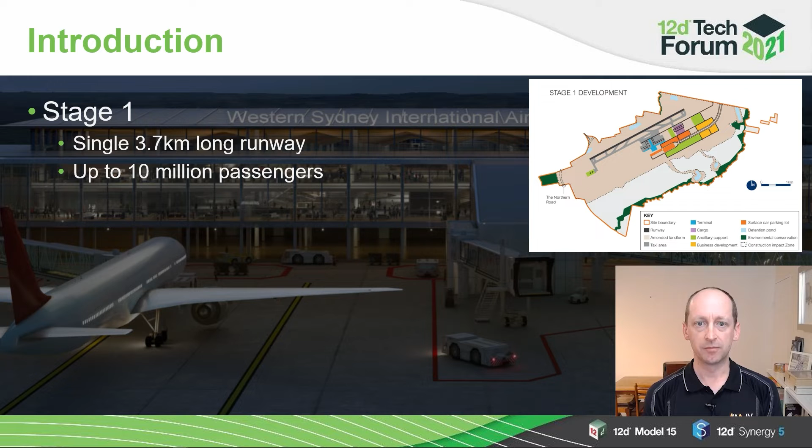When the airport opens in the mid-2020s, it will have a single 3.7 kilometre long runway and associated taxiways, aprons and aviation facilities. This will cater for about 5 million annual passengers, which is expected to grow to 10 million after about 5 years. The airport has been designed to be developed to meet demand. Additional taxiways can be added to increase capacity to about 37 million annual passengers. A second runway will further increase capacity to about 82 million annual passengers around 2063. This is about double the number of passengers through Sydney Kingsford Smith, pre-COVID obviously.

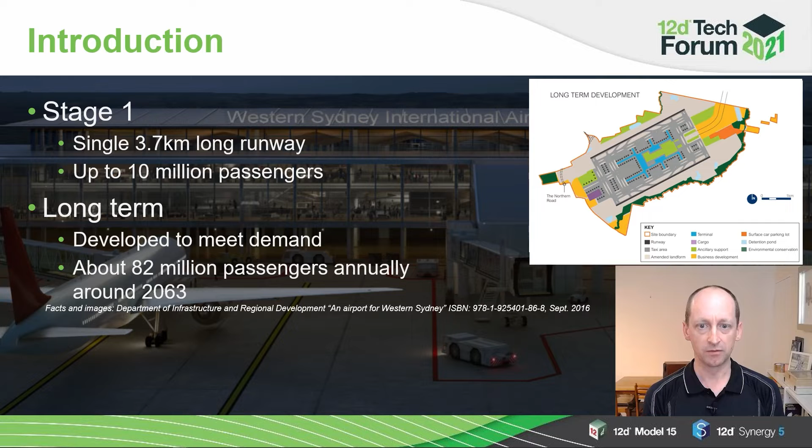It's hard to convey how vast this project is, but two key figures will help. 48 kilometres of stormwater pipe will be constructed, and 25 million cubic metres of earth will be moved, which Pat will talk about next.

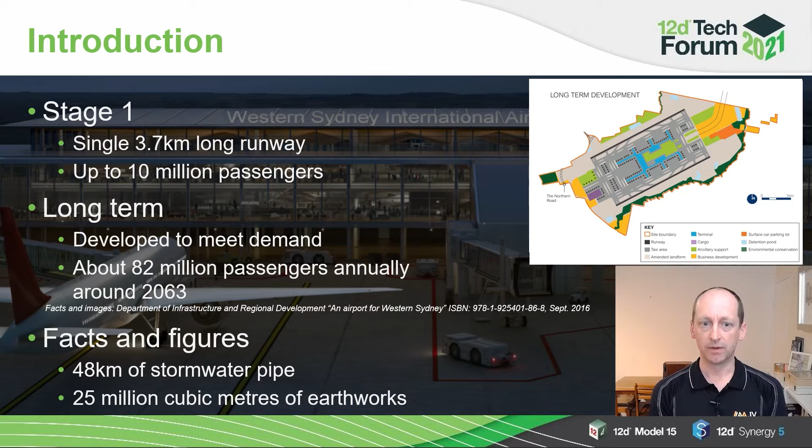12D Synergy was used to manage 12D model data. This gave great vision of data history and seamless data sharing with users around the globe. AAJV 12D model customization enabled consistency of data creation between JV partners and project-specific data sharing. The AAJV 12D model manual helped with the implementation and management of data creation standardization, including information concerning stage, zone, surface naming conventions for projects, models, TINs, and strings.

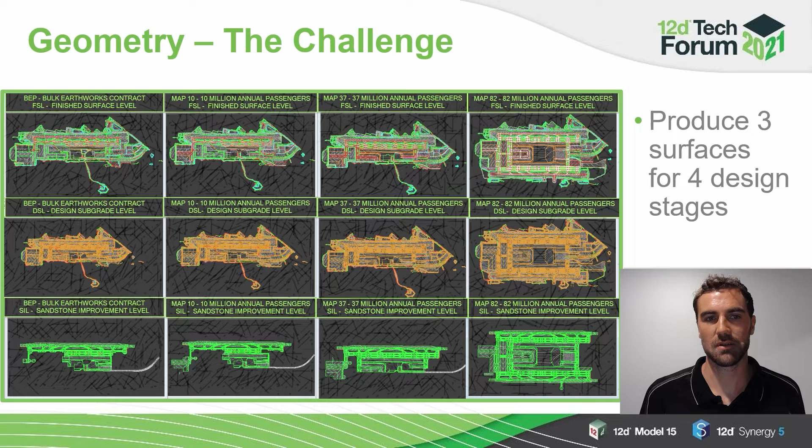The major challenge from a geometry perspective was the scale of the deliverable at hand: to produce 3 surfaces (finished surface level, design subgrade level, sandstone improvement level) for 4 design stages (bulk earthworks contract, 10, 37 and 82 million annual passengers). A total of over 50,000 strings, 2,000 super alignments and 380,000 points.

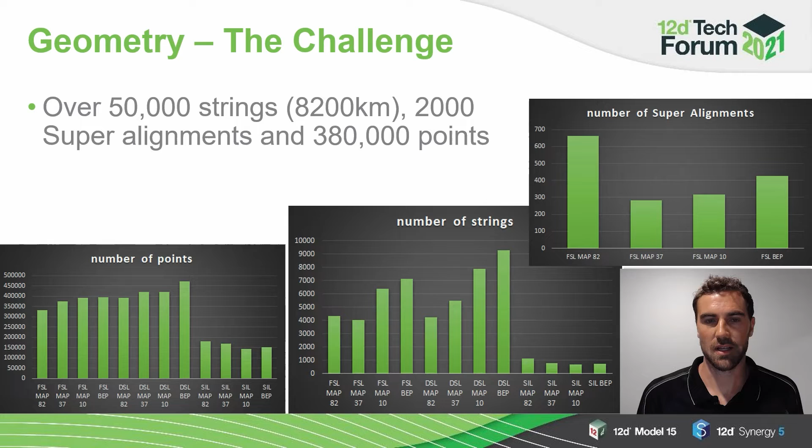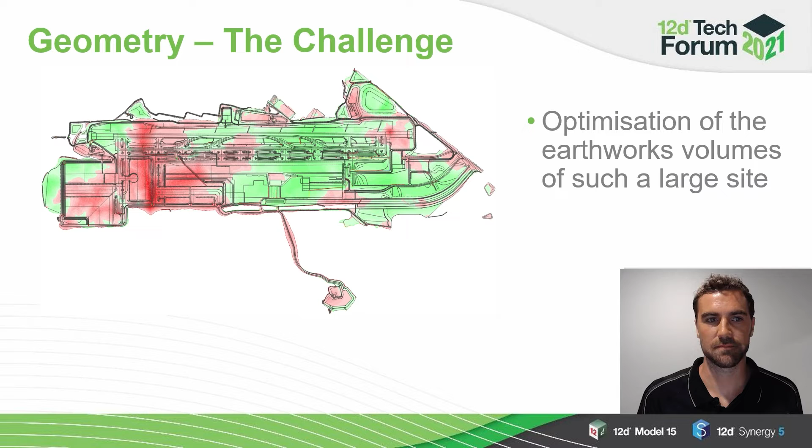Optimization of the earthworks volumes of such a large site, where a vertical change of 10 mil could result in 100,000 cubes of earthworks, required much optioneering to achieve our solution, essentially warping of surfaces around geotechnical conditions whilst maintaining a compliant design. How do we automate the design updates, knowing that design would change horizontally and vertically many times over the project life to achieve the ideal solution? The models needed to be completely dynamic.

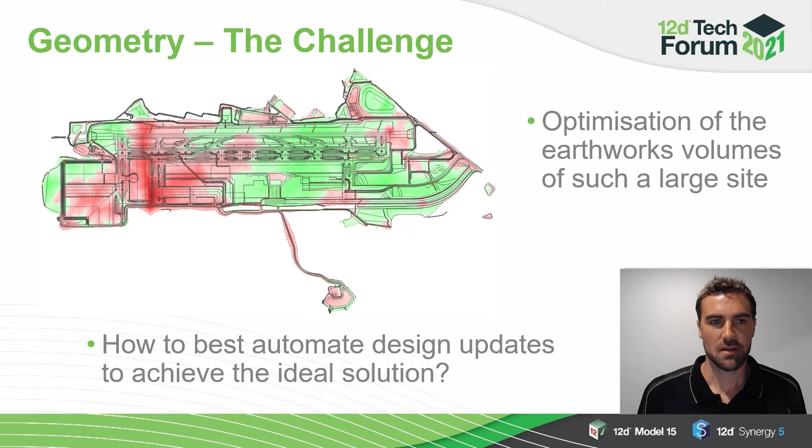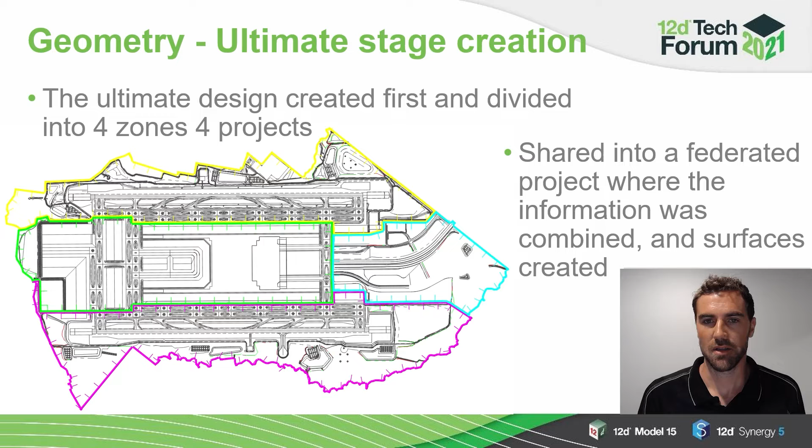Some of the processes we used to achieve this: the ultimate design was created first. Traditionally, interim staging would come first. It was split into 4 zones, 4 12D model projects, in which team members worked closely adopting best methodologies to ensure consistency in the build process. The strings for the 3 surfaces were created and shared into a federated project where the information was combined and surfaces created.

Approximately 50% of the ultimate design strings were duplicated and manipulated to form part of the interim stages. Additional stage-specific information was created inside the project to complete the stage designs. This is a general overview of the process.

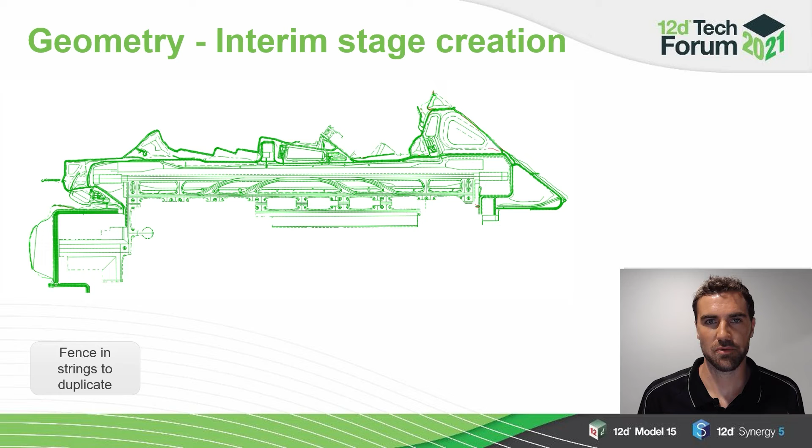Fence the ultimate design strings to copy by using a closed super alignment. Fence the ultimate design strings to manipulate by using a closed super alignment, and then translate the information to required depths. Create any strings that are specific to the stage by applying MTFs to super alignments. Any string information that is used in more than one stage is copied within one MTF.

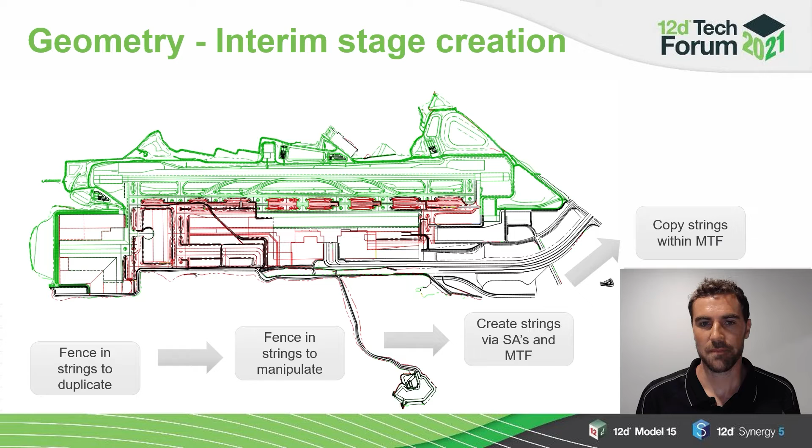Remove copied strings when new strings are created by fencing out the data using MTF polygons or tin boundaries. And then we copy it to one model.

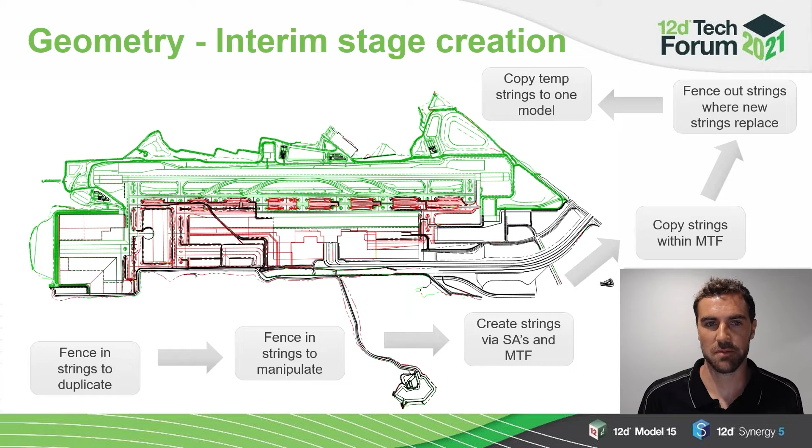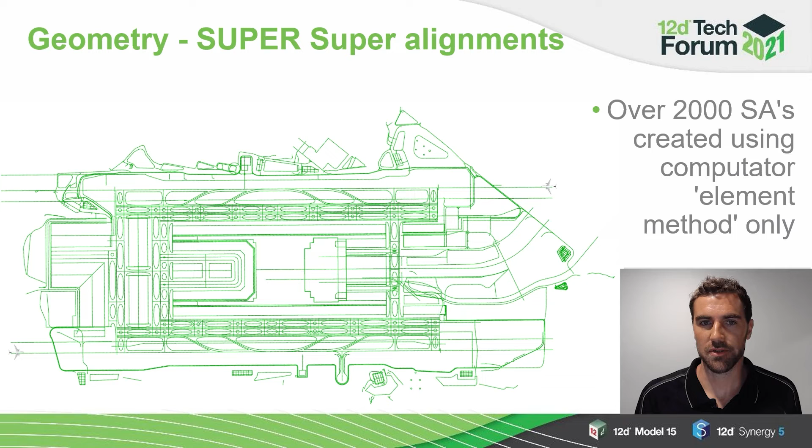Over 2,000 superalignments were created using the computator element method only, which ensured alignment controls were fully dynamic and updates of controls were automated. Master controls of the airfield geometry, runways and taxiways were created in a separate project, then shared into zone-specific projects and referenced in zone-specific superalignments. These controls set the general levels and site layout.

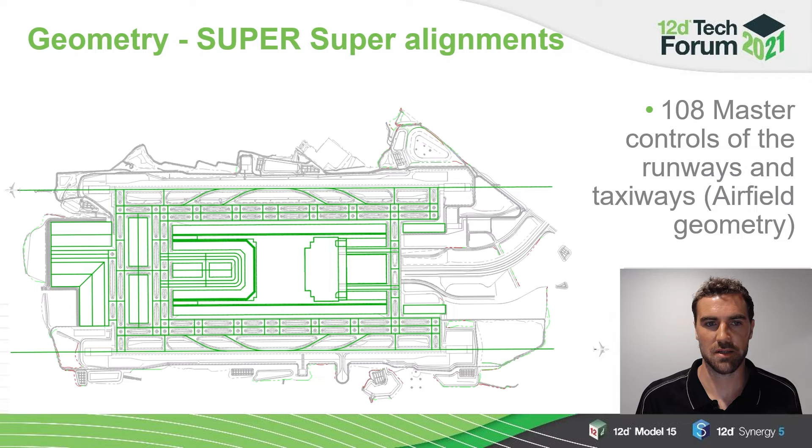They were manipulated many times, approximately 150, for optioneering purposes to achieve the preferred geometric solution. This ensured a greater control of critical airfield design geometry, while allowing other team members to focus on content creation, facilitating fast optioneering.

When referring to fillets in airfield design, we're referring to the pavement edge between taxiways which follows the plane turn path. The complex horizontal and vertical geometry was created relative to taxiway master controls. So when the master controls were updated, the fillets were easily resolved and recalculated.

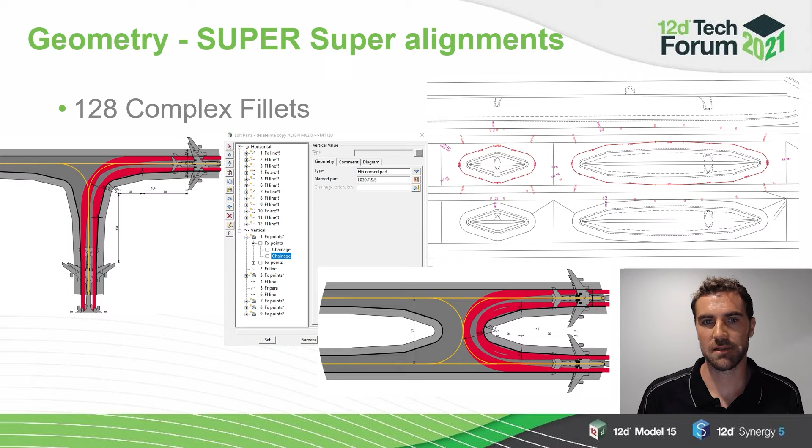Creating the finished surface strings was detailed in itself, although the subgrade and sandstone improvement strings also had their own nuances, which would evolve over the project life, including different offsets and pavement interfaces depending on the geotechnical conditions of a particular area. Layers were created inside the MTF to which some of the finished surface strings were copied. Then the specific interfaces were implemented to that layer and copied to a model. Gone are the days of the old boxing method.

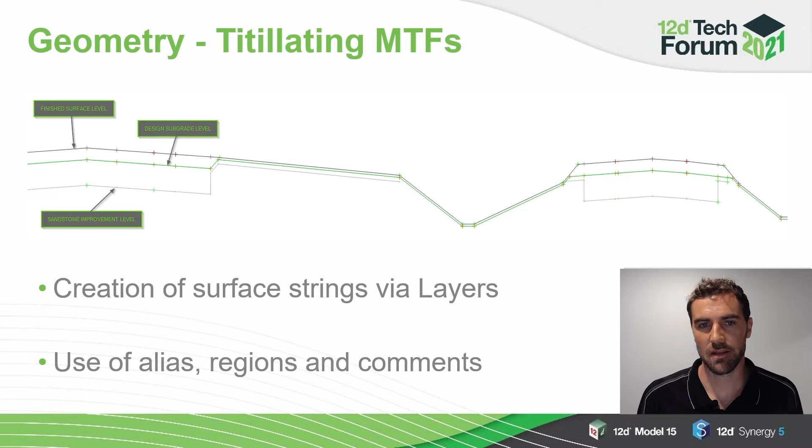In addition, the use of alias, regions and comments made even the most complex MTFs understandable. The use of chains enabled automated recalculation of all objects created in the model, whilst maintaining a record and sequence of actions required. For example, if we updated the longitudinal grade of one runway, an overview of the general process for updating all models by using chains is as follows.

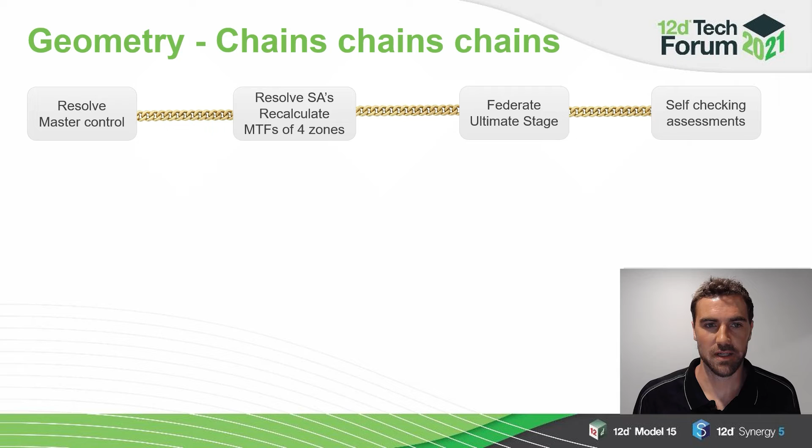Resolve all master airfield geometry superalignments, resolve all superalignments and recalculate all MTFs in 4 zones, federate the ultimate stage, then self-checking assessments of surface slopes, pavement depths, etc. If the assessment passes, we move on. If not, we go back.

Create stages BEP, map 10, map 37 via data duplication and manipulation. Resolve all stage-related superalignments and recalculate all stage-related MTFs. More self-checking assessments. If it passes, we move on. If not, we go back. Federate BEP, map 10 and map 37.

Then the design review was run by Richard. If the assessment passes, we move on. If not, we go back. Then we'd run all 2D and 3D data outputs. Go grab a coffee while hundreds of outputs were processed. This ensured consistent data sharing in a timely manner.

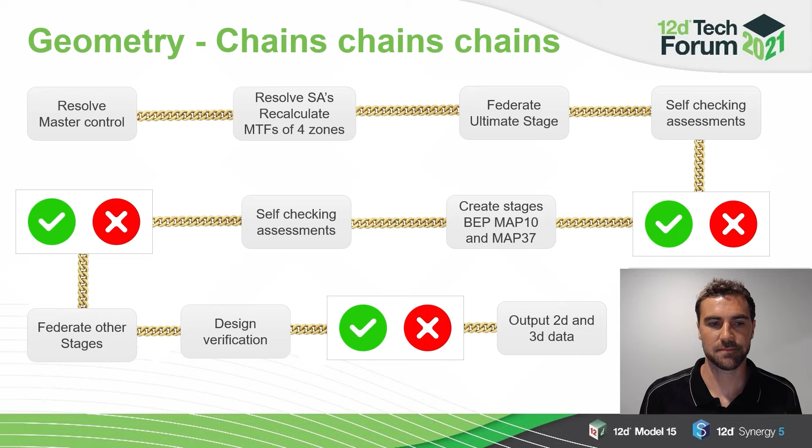That's me. Now to Michael with the drainage challenge. Thanks, Pat. So as you've just seen, the Western Sydney Airport is a pretty big and complex site with multiple stages. So there were plenty of challenges for drainage design and modeling as well.

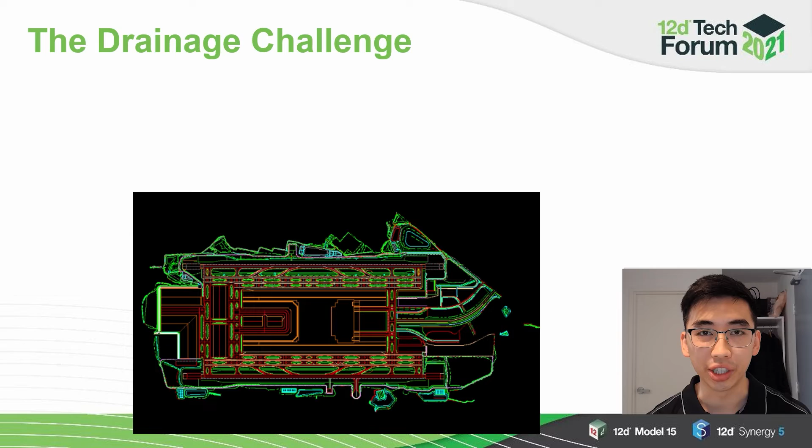There were thousands of water strings for all the culverts and channels across different stages, permanent and temporary. We had more than 10 drainage engineers working on and reviewing the 12d drainage models all at the same time, which is a lot. And finally, we had to combine all our data to produce a single output per stage frequently. So in short, the biggest challenge to drainage in this project was really data management.

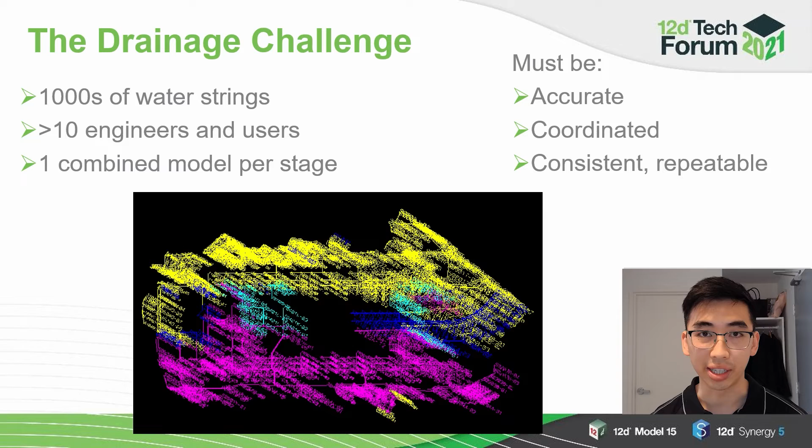How could we accurately keep track of all the different strings across the stages? How could we share data between so many users at once? And how are we going to aggregate and combine all this data in a very consistent and repeatable way? So I'm going to take you through some of the methods we used to tackle these challenges. Let's start by taking a look at the staging, which was fairly similar to the geometry team.

When the models are fully compiled, each stage is clearly identifiable with the different string color, yellow to magenta here. And just like the geometry team, we actually modeled the ultimate stage first before we split them back into the interim stages, which is not conventional.

And zooming in here, each string also had a pretty logical string naming convention to identify the different structures. This was a huge help to get schedules and quantities at the end. So for example, finding out how many pipes there were in a BEP stage, or how many headwalls there were, all we needed to do was check the string names.

And these were also accurately modeled in 3D, including all the channels, sizing and levels, so we could coordinate with the geometry team and also use them for hydraulic analysis afterwards.

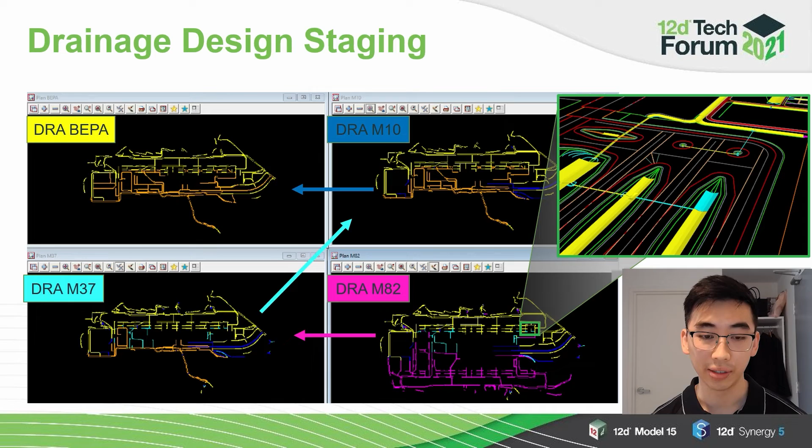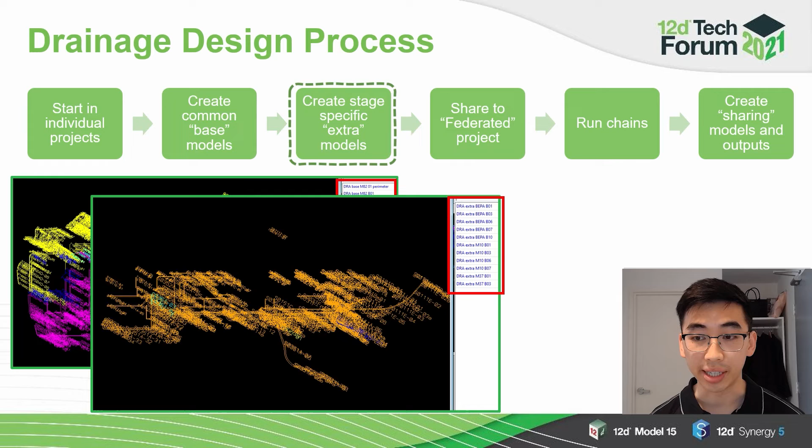The actual design process is somewhat similar to the geometry process. We start off with the individual projects and our individual designers. We model all of the base or the permanent drainage structures first, and then we model all the temporary or stage-specific extra models separately, and just share everything back into the federated project using master shares.

And as you can see here, there's many different models and many different projects. So we use the project description in Synergy to keep track of all of these models so everyone could see the list at the same time.

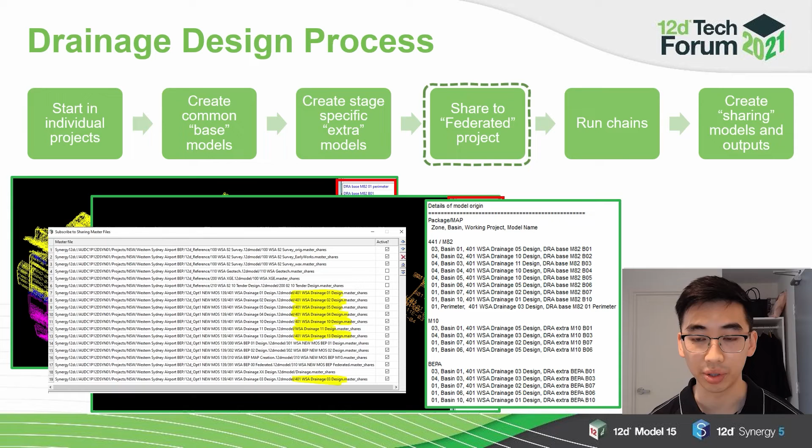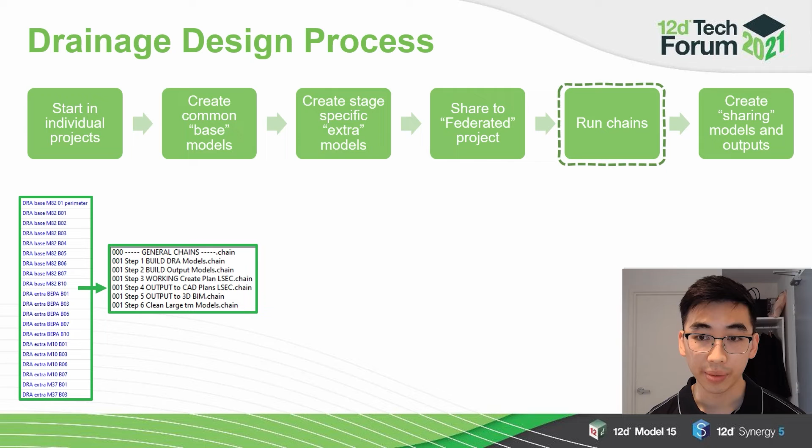Once everything was shared in, we needed to develop and run a whole suite of chains. And these chains would create all our sharing models and all our export files. As you can see on the screen, there were heaps of them, all done automatically. The best part of all of this was the entire federation process took about 15 minutes. So we could run these chains every single day, and everyone in our team could see all the latest changes and talk to each other and fix all the problems on the go.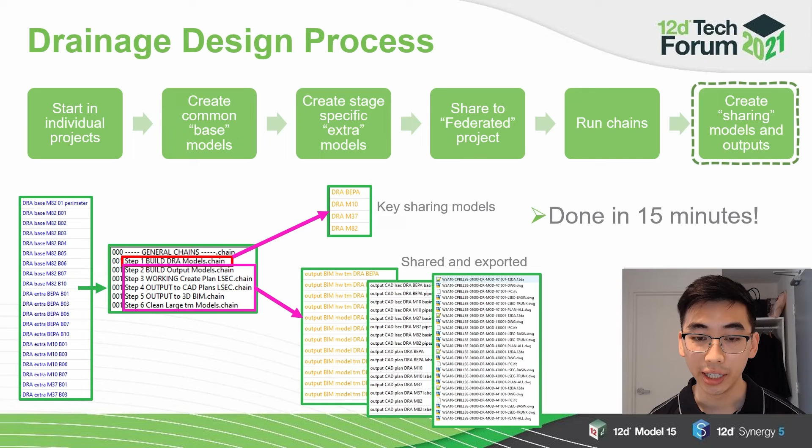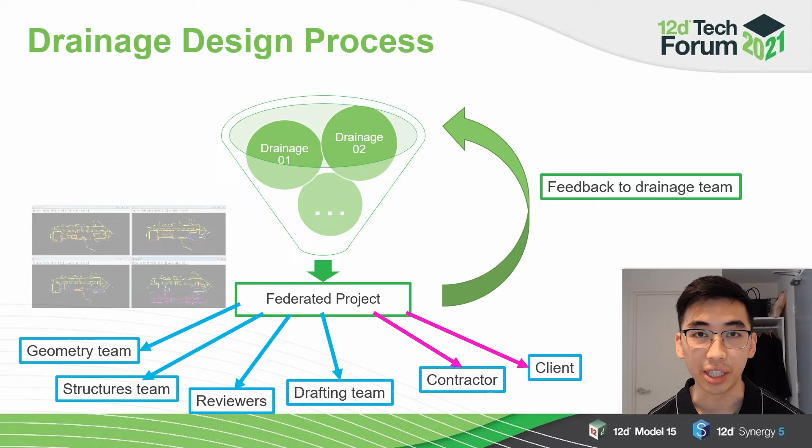This graphic here shows the key role the federated project played in one slide. So we funneled in all the data from the drainage designers, created this whole sort of platform that everyone else could view, the geometry, the structures, reviewers, clients even, and could even feed all this feedback back to the drainage team quickly.

As an added bonus as well, we used the federated project to add the final touches to all of our BIM outputs as part of the whole federation process. So I've shown the culvert headwalls here and the attributes, and these will all be automatically added at the end through some pretty long chains.

And this was a huge time saver as well, because the drainage designers could focus on all the other things like the pipe sizes, the pipe levels, whether the channel sizing was right, and they didn't have to worry about all the different headwall sizes or even the attributes for the metadata or BIM requirements. And we could produce all of this in a very consistent and very repeatable method using all the chains that we developed.

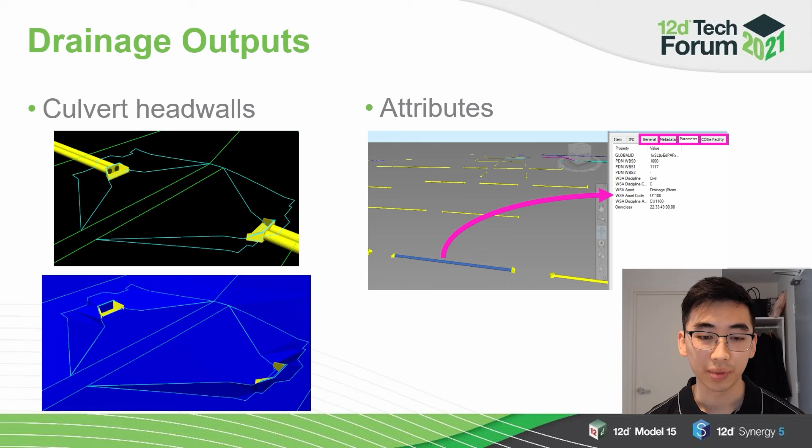So by developing and implementing a pretty logical set of chains, procedures, and using a federated project to sum all our data together, we achieved some pretty good outcomes. We created really accurate models in each stage just by filtering and duplicating the right data. We had a really consistent and also almost live model that we can share to our team daily. The whole federation process was quick. It only took 15 minutes and is fully automated.

And it's basically saved us many, many hours in design and checking. And it's let our designers spend more of the time on the critical modeling and analysis work. That's it for me.

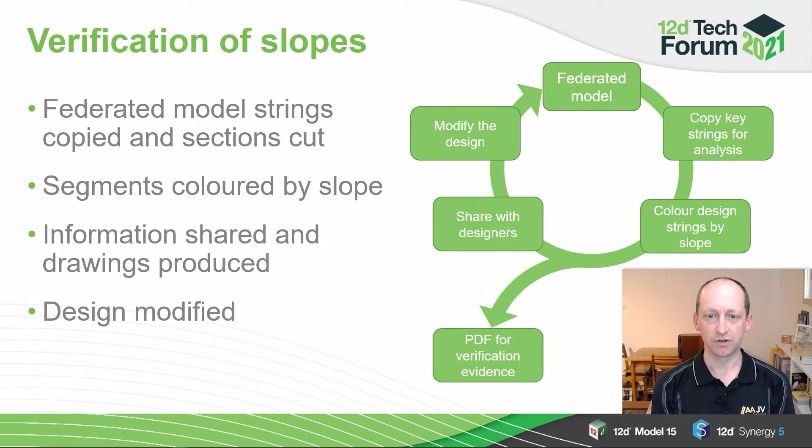The longitudinal feature strings for centre lines and edge lines, along with wheel path lines, were all analysed. The drawing sheets used were identical to the design drawings. The drawing content was managed by view favourites and a spreadsheet for the title block content.

Problem areas were quickly identified and the design managers had the reassurance that areas were turning green each week. It also showed that it was impossible to be fully compliant in particular areas.

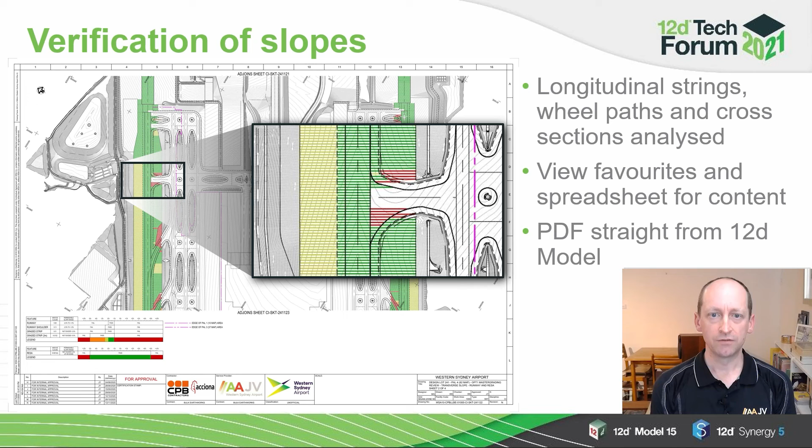The whole range of checks could be performed and documented in about 20 minutes. This meant that it could be run on a daily basis, even in the busiest times of the project.

Slope range files were presented in a unique table style so that conformance of different features could be presented in a single plan. The PDF plans were included in design reports and used at design review sessions. Non-conforming areas were highlighted and reviewed in detail in the model.

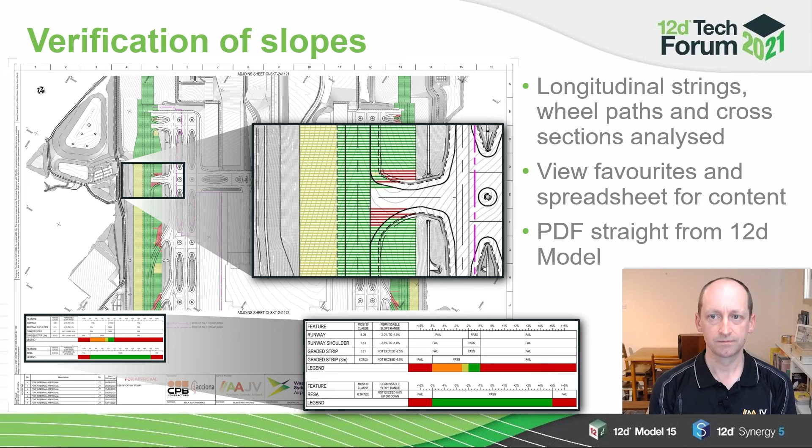A conformance check that is unique to airports is a check for change in grade. This check has to be done for the runway and the runway strip, which is the area adjacent to the runway pavement.

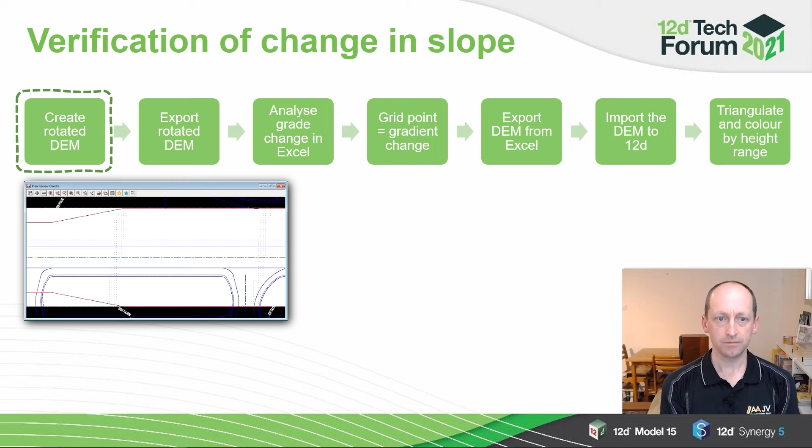We created a 1 metre grid aligned with the runway. The y-axis of the grid ran along the runway and the z value was the design surface level. This will really show you how powerful grids or rasters are for analysing data.

This grid was exported to Excel to calculate the change in gradient at each grid point along the runway. The percentage change in gradient was saved as the grid Z value. We then imported the grid back into 12d, triangulated it, and shaded the gradient values, or the tin Z value, with a height range file.

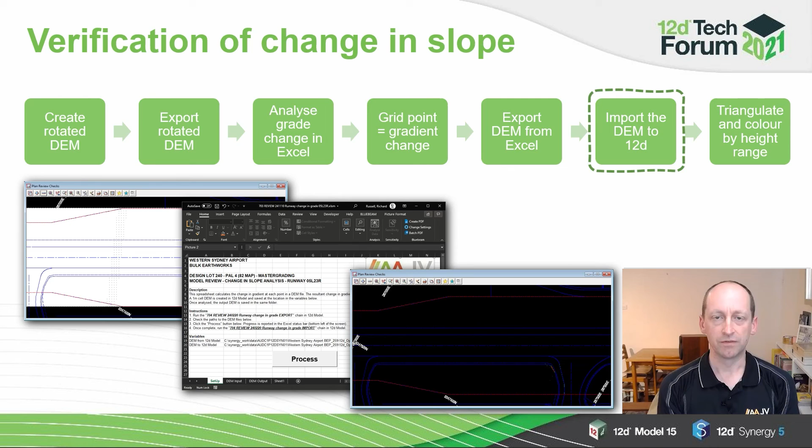The result of the change in slope analysis was presented on plans. These images are taken from a late stage in the design process, so many of the non-conformances have already been addressed.

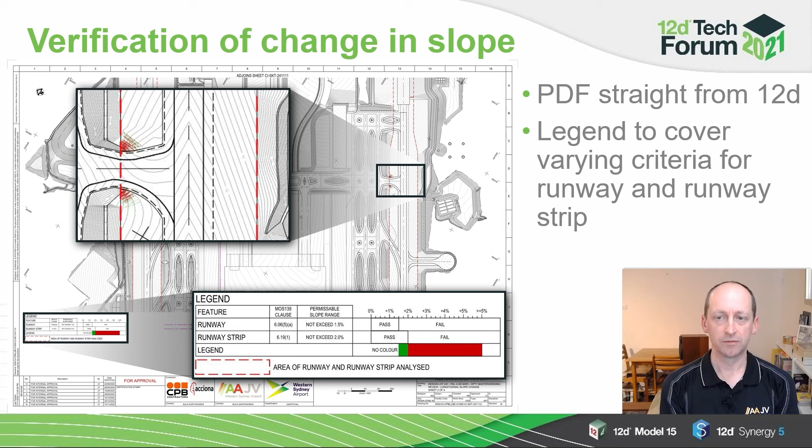When you have a project with significant depths of fill, long-term settlement is going to be an issue. We needed to be sure that the runway and taxiways were not going to settle out of conformance. 12D already has tools that could be used to perform this check.

Firstly, a 10 metre grid was created over the whole site. Using the create Z values from tin differences function, the level difference between the natural surface and the bulk earthworks was saved at each grid point.

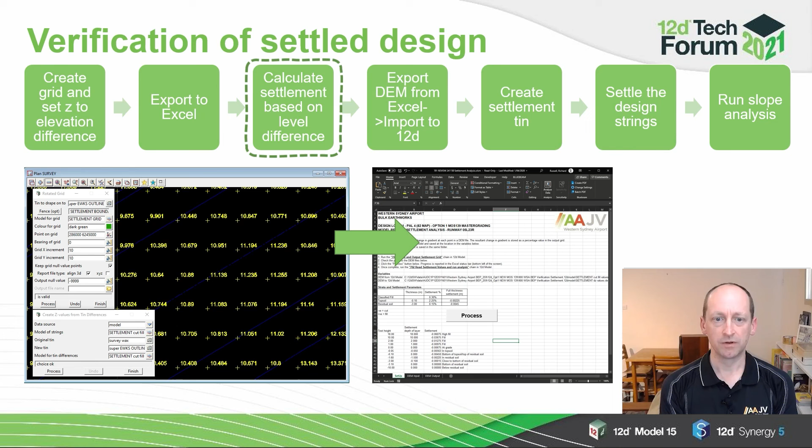This was exported to Excel to calculate the predicted settlement at each point, based on parameters from the geotechnical engineers. We imported the grid back to 12D and triangulated it to make a settlement tin.

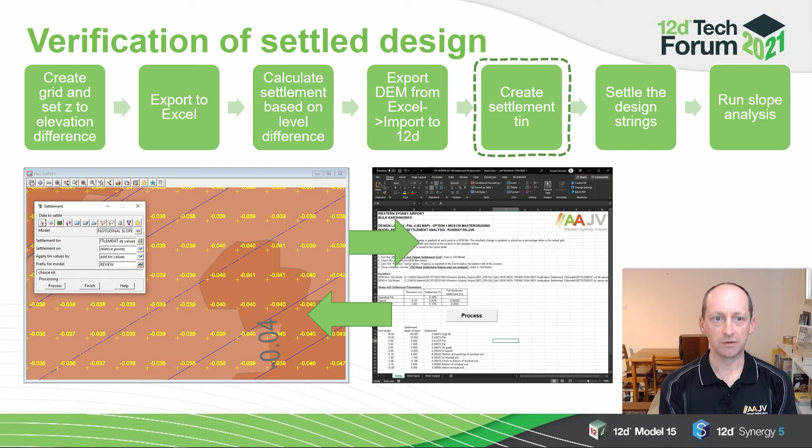Using the settlement function, the design strings analysed previously were settled, and the segment slope analysis rerun. Generally, this showed that conformance was maintained after long-term settlement. Some areas actually improved after settling.

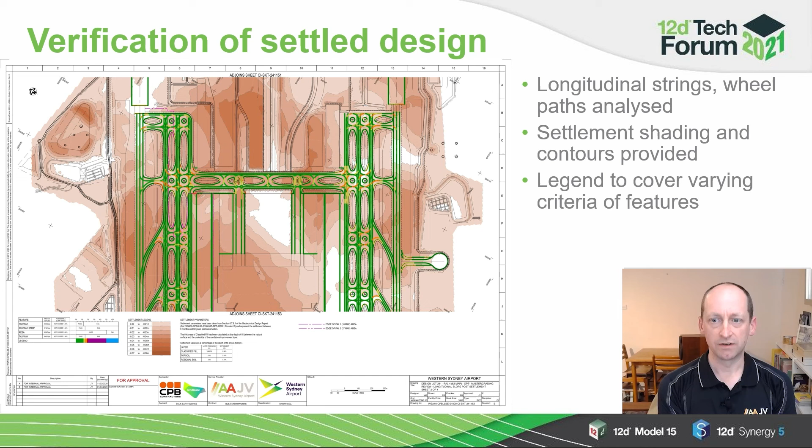The plans produced to show the longitudinal slopes post-settlement used several presentation tricks, overlaying the height range colouring of the settlement tin with settlement contours, and view favourite files to control the plan view display settings and drawing order to ensure consistency when plotting.

Several successes were realised from the verification processes we set up, including the design verification into design development workflow, which allowed the design team to quickly correct non-conformances and focus on key problem areas.

High quality presentation meant that the design check drawings could be included into design reports with no additional work. The process developed a high level of trust between the client's verifier and the design team.

Thanks, Richard. So you've just seen how the three of us and our team successfully used different parts of 12D to deliver a full-scale geometry design, drainage design, and verification on one of the biggest infrastructure projects in Australia.

With the help of 12D Synergy and some ground rules for sharing, we successfully coordinated more than 20 designers working together on the same models remotely, without it turning into a huge mess.

By taking advantage of chains throughout the delivery process and having an automation mindset, we've created a very consistent and streamlined methodology which saved countless hours of designing and checking.

The biggest insight of all is that all the time we spent on data management strategizing and project setups was crucial for our overall success.

Even when the pandemic hit in the middle of our major deliverables, we could stick to all the plans and processes we developed, transition quickly to working from home, and successfully deliver the Western Sydney Airport bulk earthworks detailed design.